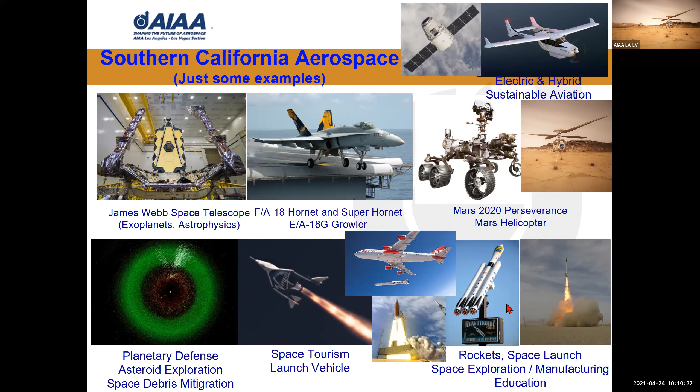Okay, so just a few words. Southern California, Los Angeles, Las Vegas section is very blessed with a lot of aerospace activities, from James Webb Space Telescope, Northrop Grumman, TRW, and Defense, Super Hornet, F-35, Rover, and JPL, just exciting Ingenuity, Perseverance, and planetary defense, asteroid exploration, space debris, Virgin Orbit, Virgin Galactic, and SpaceX, just right next door, and the many space students in this area, and also Aerojet Rocketdyne.

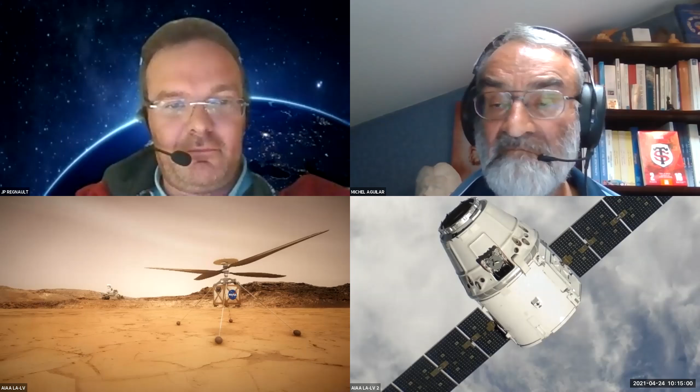Thank you, Ken. So let me share first my screen with a presentation, and tell me when you see the screen. So we have a 25-30 minutes presentation. Yes, no problem. You see? Yes, I see it. Okay.

So as we have introduced, and thank you again for having us, Ken. It's a great honor to be here from Meudon. As you have mentioned, it's a very small city near Paris, and you will see in the few slides that it's a birthplace of air ballooning in Europe, and it's also a place where the first wind tunnel in Europe was built in 1933, and I think quite also in the world.

Let's start with the bio of Michel. I'm trying to go to the next slide. Do you see the next slide or not yet? Not yet. Let me see. Why is there a technical issue? I did not manage to go to the next slide. Okay, here we are. Yes. May I have a small word? Yes, please, Michel. Thank you, JP.

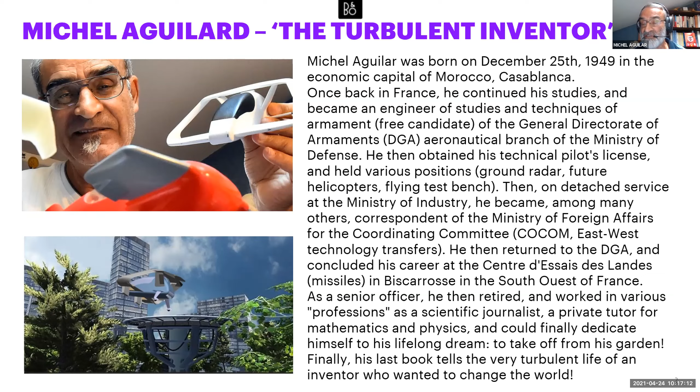And second, congratulations, very, very supersonic congratulations for the helicopter taking off from Mars. And you see, you take off from Mars, and we hope to take off from our garden. Yes, JP, for you. Yes, thank you for this first intro, Michel. And you will see, that's the title of this session: "Taking Off from the Garden."

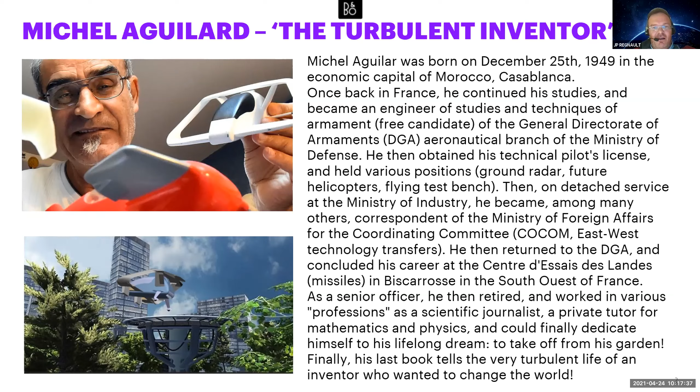And I remember the first time I met with Michel, it was 1 year ago. My impression was clear. Taking off from the garden is the obsession and definitely the dream of Michel after a brilliant 40-year career in aeronautics. Briefly about myself, but Ken, you've done it already, and thank you for that intro. So I'm living near Paris. I'm a great fan of all things around aeronautics and especially air ballooning.

And effectively, I've launched with some of my friends an initiative around this Star'Up Festival. It's a mix between startup and stars. The intent is to bring different experts and the general public together during 3 days. And the third edition will be late June in Meudon, near Paris. The intent is to bring to the general public what will be possible for the next 10 to 20 years around new types of transportation in space, in urban mobility, and a lot of subjects like this.

Okay, so this is the agenda of this 25 to 30 minutes presentation. First of all, the intent was to set the scene with a very small recap of what we call the theoretical basis around this new type of concept around the thermoreactor. Just after, we'll recap very briefly, for sake of time, what has been launched in terms of initiatives around this famous Humphrey cycle.

We will also deep dive into what has been the trigger for Michel around this thermoreactor innovation. We will describe then the discussions already held with the global ecosystem, not only in France, Toulouse, but also at the European level, to help Michel jump from disruptive ideas to a first proof of concept. And then we will conclude, before an amazing video, with what's next: the next intention and ambition of Michel to move forward with this disruptive invention based on the Humphrey cycle.

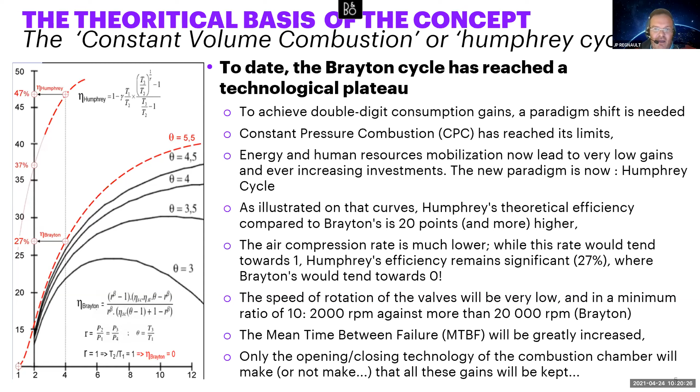And over to you, Michel, just as a short introduction around this very well-known Humphrey cycle. Thank you. The difference in efficiency between constant pressure combustion, CPC, all current jet engines, and constant volume combustion, CVC, the thermoreactor, is between 15% and 30%, depending on the mixing pressure in the combustion chamber. Mr. JP? Yes, okay. So the intent of this slide is just to recap the difference between the traditional constant pressure combustion and the constant volume combustion.

We have found in different articles what has been based on this Humphrey cycle, what has been already presented by the famous DARPA in the US. Also, the same type of studies have been performed by the DGA, which is the equivalent of the DARPA. The same in Germany, in Canada, and India. So in a nutshell, it has been demonstrated that when it comes to this Humphrey cycle, it's a real game

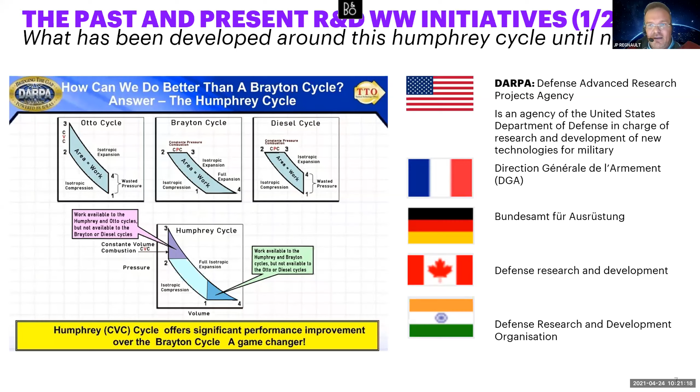changer. And we have presented this as an introduction because during his career, as I said before, Michel has been obsessed by the industrial implication of this cycle in order to bring this to the real capacity in terms of combustion and a constant volume combustion.

And by the way, if you double click on what has been performed during the middle of the 20th century until now recently with Pratt and Whitney, we see that based on this Humphrey cycle, some tangible research has been performed, especially by Rolls-Royce with Purdue University in the US, in order to see how to implement this Humphrey cycle with tangible engines applicable to airplanes and so on and so forth.

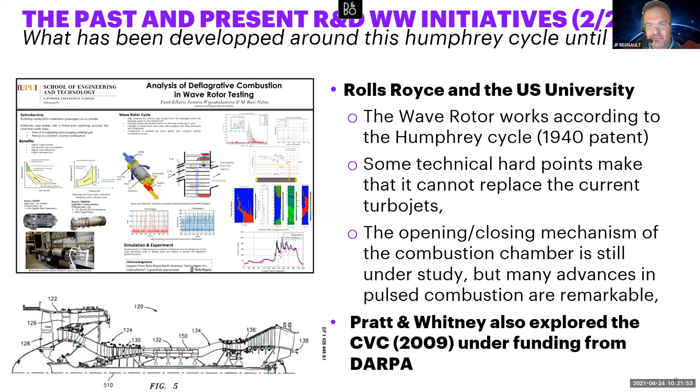In order to jump to this disruptive innovation brought by Michel, I would like Michel to share with our attendees what has been your motivation based on your long-lasting career. What has been your motivation? And I will say the trigger element, which I can imagine a morning you wake up and say, by the way, it is exactly what I have to transform when it comes to this Humphrey cycle. Could you share with us a few words around your motivation and what has been the trigger before your work

around the thermoreactor? Yes, my first tests on pulse combustion were carried out during my last year, 1977, my English, sorry, of training at the Aeronautical Engineering School in Toulouse. At that time, I was also convinced that opening and closing a combustion chamber could only be done with an alternative mechanism. JP?

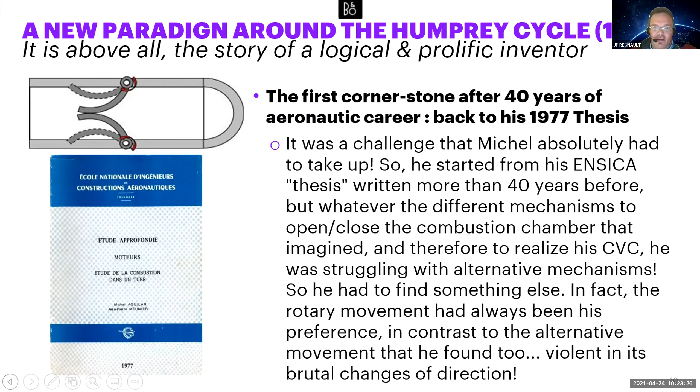So if I summarize in a nutshell, let me come back to the previous slide, sorry. So the key element around this innovation is definitely what we call the alternative movement as a continuous rotative movement. That's why we have a small animation. So tell me if you see the animation, where you see one cycle of the combustion chamber, which lasts something around 15 milliseconds.

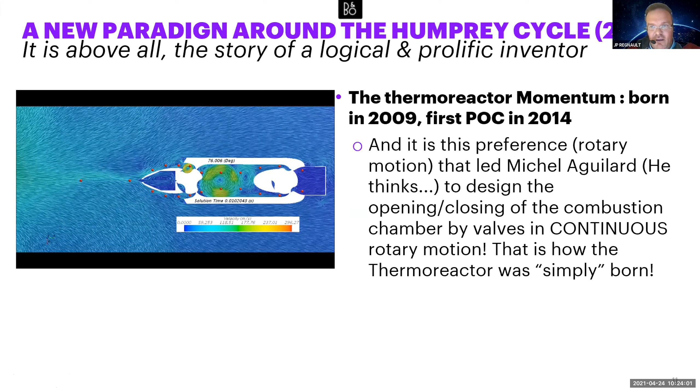You're okay with that, Michel? Yeah, yeah. So you see exactly the illustration of this disruptive innovation, meaning this constant rotative movement in the combustion chamber. Yeah, which is the most important, the rotative movement, the basis of this thermoreactor.

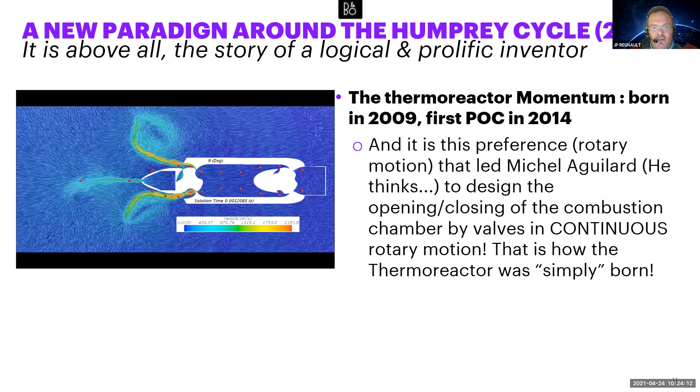Yes, correct. But beyond this theoretical basis, beyond the fact that we see that the performance of the Humphrey cycle is quite better than the Brayton cycle, which is currently governing the existing turbo reactors all around the world, Michel, could you share also what is the potential impact due to the small size of this thermoreactor engine for potential new business cases and business models?

And for me, I remember my first discussion with Michel. I think that beyond the better performance, and by the way, less consumption of fuel, we think by 20% minimum. That's exactly what Michel told me, and you do confirm that from a pure fuel consumption standpoint, we are reaching a decrease of 20%. This decrease, and we are at Earth Day, of course, is contributing definitely to the global warming equation, I will say.

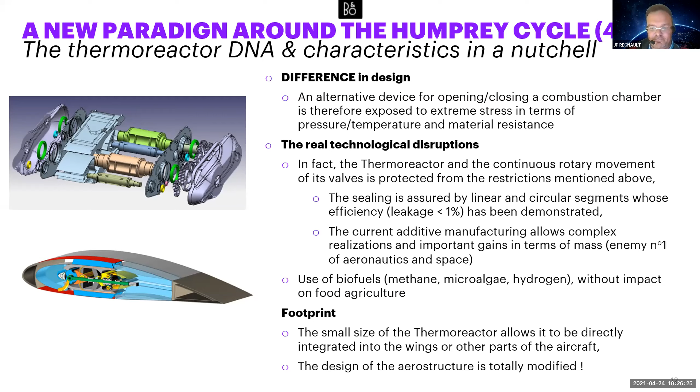And you see, JP is the big chief of our R&D. No, okay. No, you are joking. So

thank you for this transition, because, you know, especially in France, and it's the same in the US, an innovation is not real if you are not recognized by your ecosystem, your industry.

So could you share with us, Michel, what has been your journey when it comes to the patent you filed starting in 2012 in France? The US represents 50% of the world aviation, so it's very important — the US delivered the patent for the thermoreactor in 2018. That's very important for me, and I'm really very proud of this. Japan came before, in 2017. France, of course, in 2012. And Canada, the patent is still in progress.

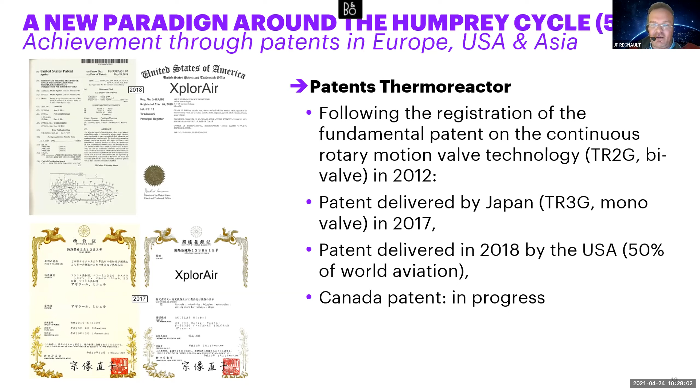Yes, thanks, Michel. So beyond these basic patents recognizing the technical feasibility of the thermoreactor, I know you have also performed additional patents dedicated to connected subjects, especially the drag reducer. Could you give us a few words about that?

Yes, the drag reduction patent is very important because it applies as well to aircraft as to rolling vehicles, cars and trains, and is particularly adapted to electric cars so as to increase their autonomy by more than 40%. I can explain the technology behind that, no problem.

The other patent, the ejector patent, in accordance with work carried out by NASA — this ejector, adapted to the thermoreactor, makes it possible to strongly increase thrust at takeoff, especially without overconsumption of fuel or degradation of drag. That's very important.

And the last one, for now — the reverse patent, still under examination in France. This device will make it possible to increase the thrust of the current turbojet during all phases of takeoff and the rise towards cruising altitude, without overconsumption of fuel. Very important. It's now under examination in France, and in the US too.

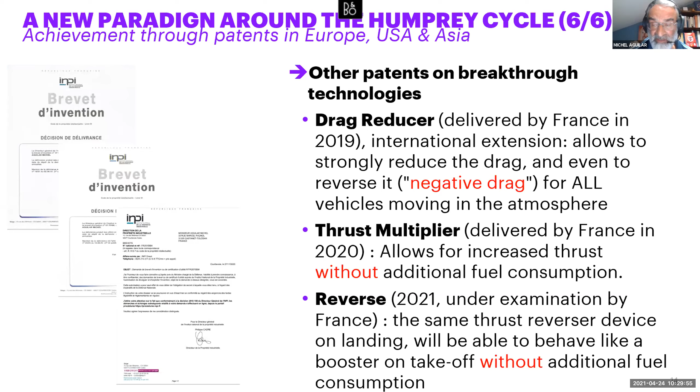So he launched, as mentioned, initiatives with the DGA, the French equivalent of DARPA, in order to model his invention and transform the concept into a tangible engine with the help of Dassault Systèmes, a well-known subsidiary of Dassault Aviation in France. And further initiatives with EADS, now the well-known Airbus company, headquartered in Toulouse as well.

And not only initiatives with the aeronautics ecosystem, but also with the Toulouse Business School, in order to prepare potential new business models and use cases. So you see, in parallel, a journey around technology disruption and innovation, plus anticipation of potential use cases.

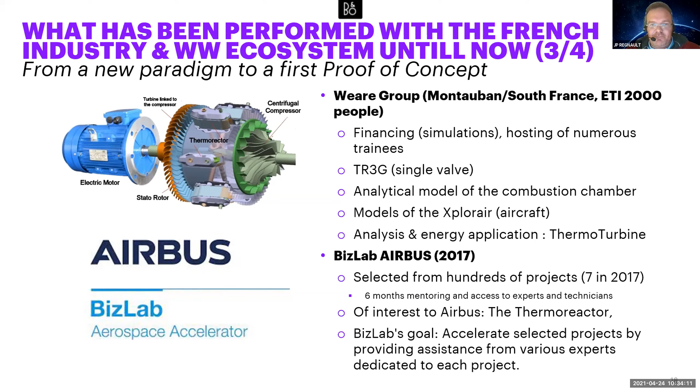Not a trap for you, Michel, but let's be transparent. If you have a dream and want to take off from your garden, you can imagine taking off from your garden. But if you produce the equivalent noise of the British Harrier or the US F-35, you can imagine it will create some issues with the neighborhood. So could you share with the attendees what has been the concern around the noise and what has been performed until now to find a solution to reduce the noise during the takeoff flight?

You can show this. You can read this illustration.

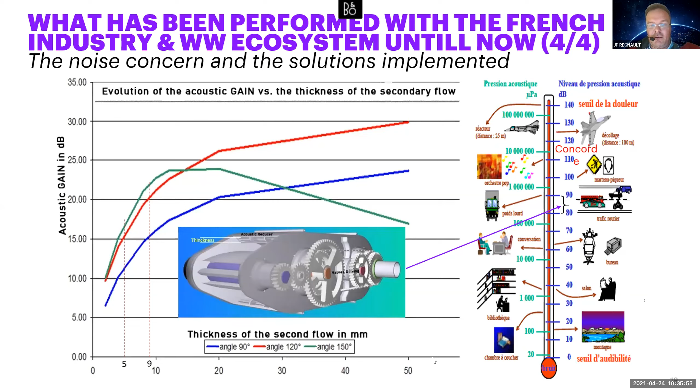So now the key question. If we summarize briefly this presentation, after 40 years of career in aeronautics, after a first successful tentative with different patents in France, in Europe, in the US, with let's say 10 years of discussions, R&Ds, workshops, participation in incubators and accelerators, we are now at the level of a sustainable proof of concept.

So what's next? Definitely, the intention is not to stick to this first proof of concept, stage 1. The intent of Michel is to move forward, aiming at reaching a pre-industrial prototype, adding all the technologies and disruptive solutions around the thermoreactor, as we presented before.

Correct me if I'm wrong, Michel, but your first assessment is to have something around an extra 28 to 35 months, so let's say 2 to 3 years, to reach a new plateau, a new level, and this pre-industrial minimum viable product, to be in capacity to present officially a drone version of the thermoreactor, potentially in 2025 during the Paris Air Show, and why not during the Nellis Air Show in 2025 also, and why not earlier? So this is where we are.

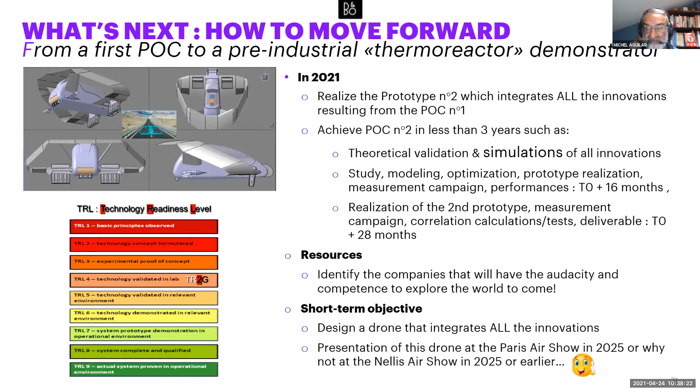So it's quite impressive. So now, as a conclusion, I hand over to Ken, just to play the video, which is a sort of a concrete dream presented in a video, showing a potential use case derived from this disruptive innovation with the thermoreactor. Ken, hand over to you.

Okay, can you see the screen now? Not yet. We see the first image, but I think it doesn't work quite well right now. Okay, I'll start playing. Or what I can do... Yes, that's good, it's good. We don't hear the sound. Do you hear the sound? No, I don't hear it. So what can I do? I've got a plan B, Ken. Let me try again. Because the sound is quite interesting also, and the comment. Let me know if you hear the sound. Yes, okay, that's good, loud and clear.

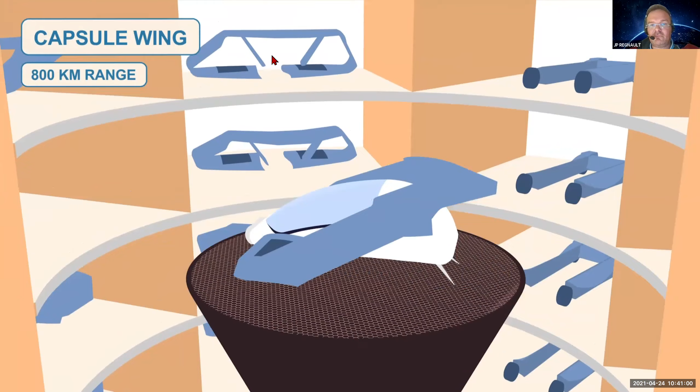A capsule chariot autonomously arrives to drive them to the nearby takeoff area, located at the outskirts of the city. At the gateway, their capsule is clipped to a wing for immediate takeoff. The capsule takes off vertically thanks to its revolutionary engine embedded in the wings.

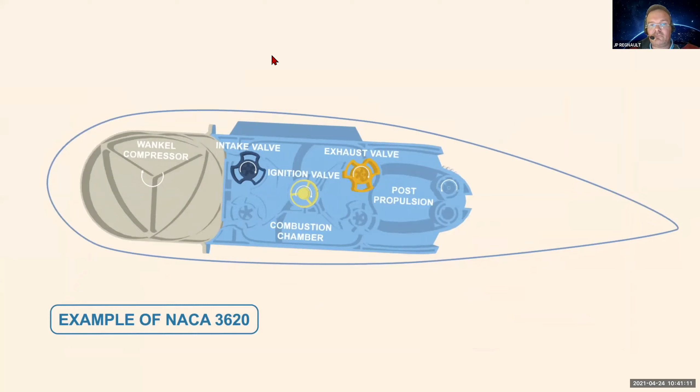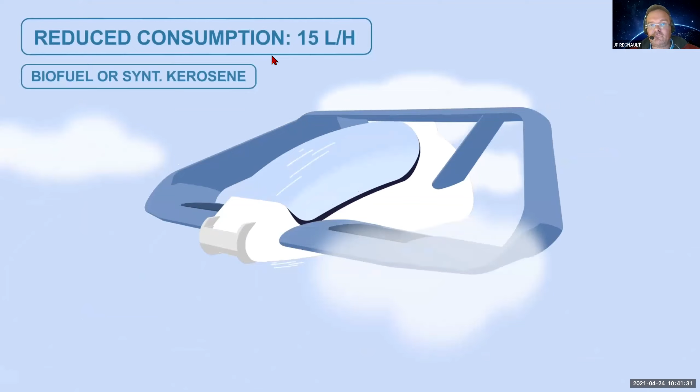In a few minutes, they reach cruising altitude and cover the distance at a speed of 200 kilometers per hour, consuming only 15 liters of biofuel per hour. Claire and Kataro can relax, enjoy the scenery, and prepare their arrival, thanks to the autopilot and security features.

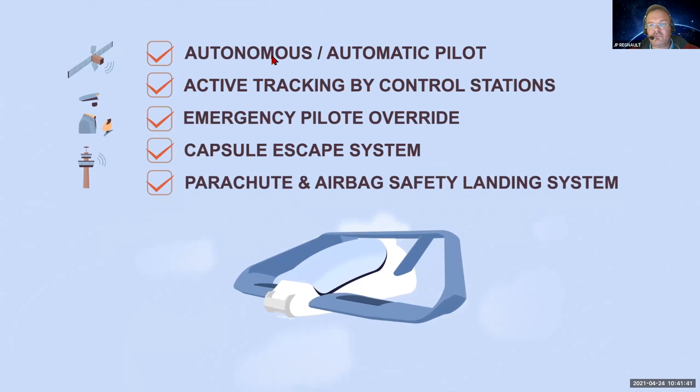Upon arrival at the intended destination, the capsule lands at the gateway and trades the wing for a chariot to drive the last mile. Claire and Kataro make it to their destination in time, relaxed, ready, and satisfied.

Yes, very good. And we are excited. Done. And so the next step is to move forward with Michel and potentially some other actors around this new journey.

And to make Michel's dream come true. Exactly. Yeah. So thank you so much, and please stay in touch and come back to tell us more progress.

And also remember, you said you would let us know the link and schedule for your festival. Yes, we'll post it. I will share with you, Ken, and if all the participants are, except due to the time zone between Pacific daytime and CET, there's something around 9 to 10 hours difference in terms of time zone. But I will be much more than happy to share with you, Ken, the Facebook Live address.

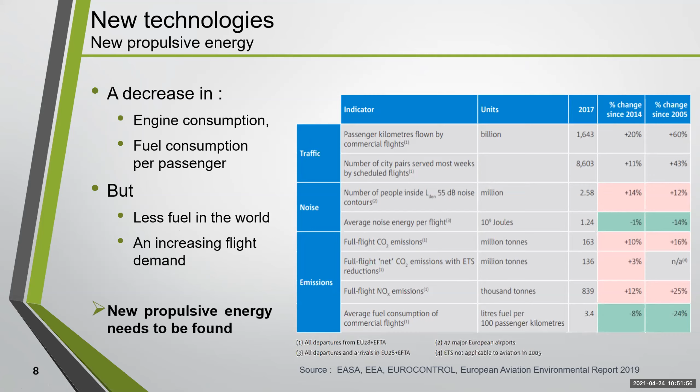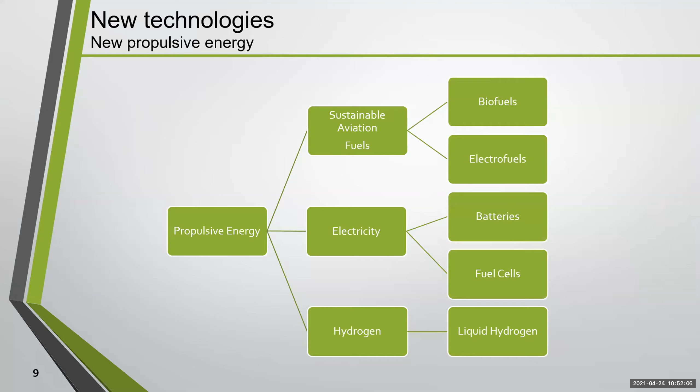A new way of reducing emissions during flight is to change the fuel used. Today, three energies are in front of us: sustainable aviation fuels, electricity, and hydrogen. Biofuels are made from compostable waste and biomass, and synthetic fuels are created using...

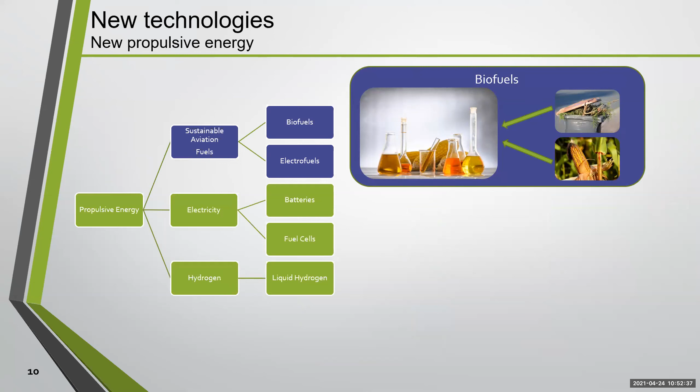...liquid hydrocarbon out of CO2 and water acquired from human emission activity, for instance. This solution is incredible because we are using unwanted material to create energy. Biofuels and electrofuels, the latter considered a renewable fuel of non-biological origin, can be used in current aircraft as a complete substitute for fuel. To keep operational safety in mind, we don't have to change power plant systems, and in terms of cost, using the same aircraft with these new fuels is economically attractive.

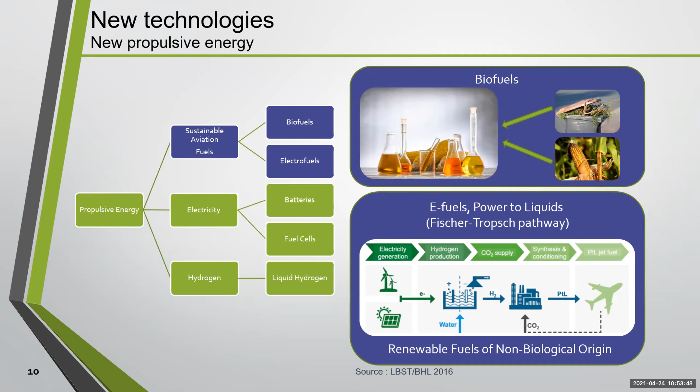So if we look at the second solution to reach the ultimate zero emission during flight, it would consist in using electrical energy instead of fuel. Even if electrical motors are more efficient than jet engines, by a ratio of 3, for example, if considering brushless motor technology, battery energy capacity is too low compared to Jet A1. Moreover, lithium-ion batteries are made of pollutants that can't be recycled or reused yet, transferring the carbon footprint onto the different life cycle stages for long-range aircraft.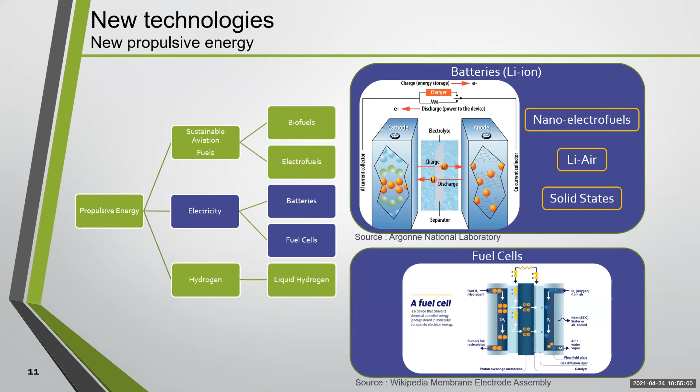So if we want to use batteries or electricity without the issues of Li-ion batteries, we can use either nano-electrofuel technology, Li-air, or directly change to solid-state batteries. If we look at hybrid configurations, for instance, it can be a generation of electricity combining fuel cells and liquid hydrogen, or the use of a high bypass ratio using LH2 as an onboard generator. LH2 is considered the third lowest carbon fuel according to Safran, as it has a rather high energy density of 120 megajoules per kilogram, and emissions stay only 50 years in the atmosphere if we take into consideration only the NOx during the flight stage.

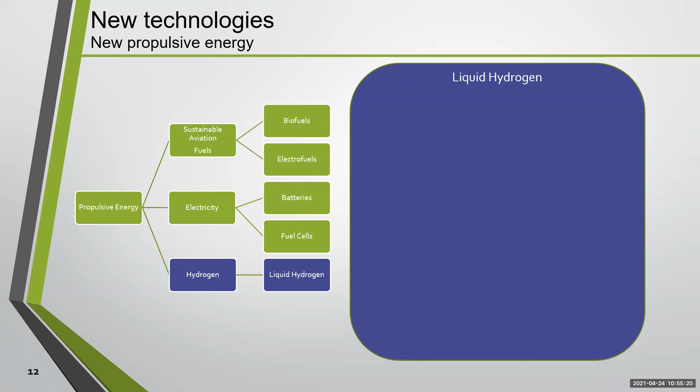So the main issues are regarding its production and bigger pressurized storage at a temperature of 20 Kelvin, which is incompatible with current aircraft configuration. Liquid hydrogen is very interesting because if we take steam methane reforming, which is not that expensive compared to electrolysis, for 1 kilogram of liquid hydrogen, there's a production of 10 kilograms of CO2, of CO, carbon monoxide. So depending on the way the propulsive energy is produced, we will have more or less footprint.

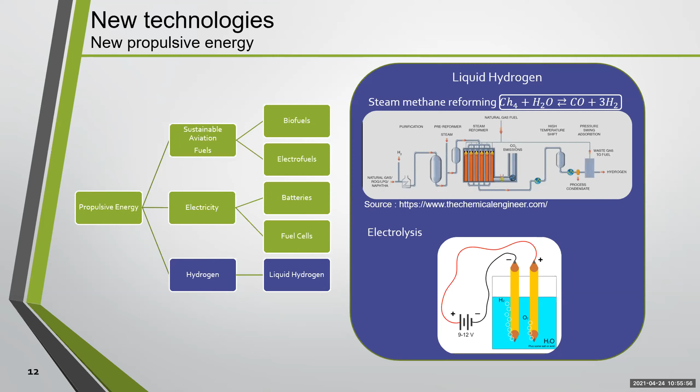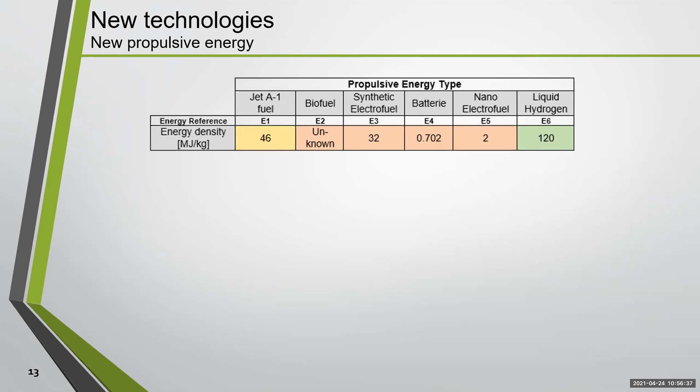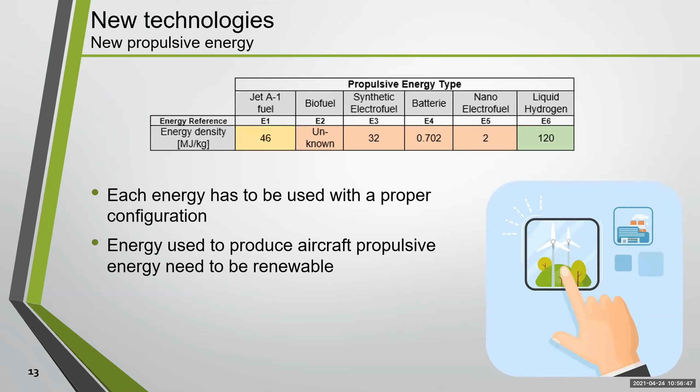So in the end, several solutions of propulsive energy are summarized in table 1, where you can see the different energy densities. We can see that liquid hydrogen is 3 times higher than Jet A1 fuel, and you can see why batteries are not very efficient yet. If we look at biofuel, it is not really known, and synthetic electrofuel is a bit lower than Jet A1 fuel, so that's why it's mixed with Jet A1 fuel when used. Those propulsive energies can lead to zero emission flight if the process of energy production is renewable. If we take electrofuel, it was estimated that its use in aviation in Europe by 2050 would increase the use of electricity by 24%.

So, after changing aircraft propulsion, the second stage to a more respectful aircraft is to change its shape, as we have been using the same single fuselage ring shape for years. Now, these systems and new technologies are improving aircraft structures to reduce drag, weight, power plant, and noise, decreasing the fuel penalty and finding optimum shapes for different propulsive systems. Two concepts of aircraft have lower drag generated during flight: box wing and blended wing body aircraft. Box wing aircraft have 2 superposed wings and a fuselage. We can also have a C configuration with a hybrid or LH2 propulsive energy, increasing the number of commercial routes. A configuration using the open rotor could help reduce noise and fuel consumption even more.

The blended wing body, also called a flying wing, has only a single trailing edge, and this reduces the drag. The length and the wide fuselage are suitable for LH2 circular tanks. Those configurations are more fuel efficient than a conventional commercial aircraft with the same capacities, reducing wingtip drag and allowing a fuselage increase for the box wing and a better lift to drag ratio for the blended wing body, as it's 20% higher than the current aircraft.

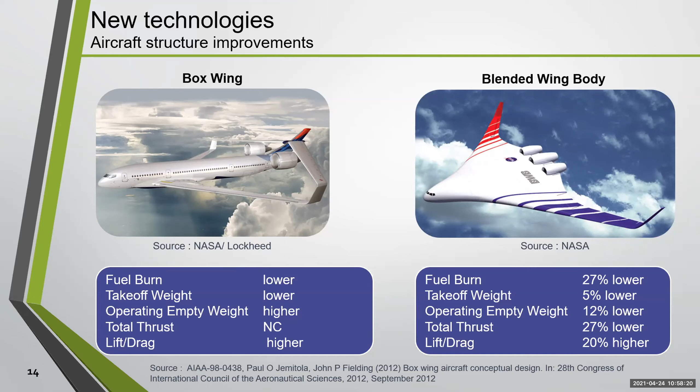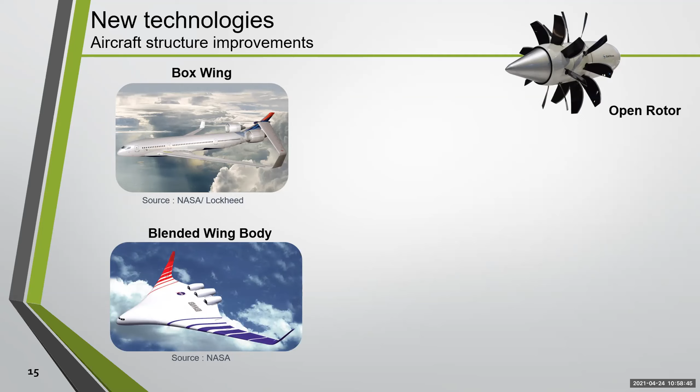So the use of those aircraft concepts can be combined with new propulsive systems. For instance, the open rotor is consuming 30% less fuel than the CFM56 or the LEAP while reducing the noise. The open rotor can only be used with fuel, so a hybrid configuration could lead to further application of this engine in the future. If we take the LH2 high bypass ratio, for instance, it's estimated to be a very efficient turbofan for long-range aircraft with good performances and noise reduction.

We can also take the distributed propulsion using a ducted fan, and that could be easily implemented at the rear of the fuselage, the wing, to create a boundary layer ingestion, decreasing the fuselage drag. So several technologies can be found. They will not be detailed here, otherwise it would be too long. So new airframe structure configurations in line with new power plants and propulsion systems will definitely help to build a more performant aircraft, allowing lower particle emissions and better aerodynamism. Technologies are still being characterized, but proofs of efficiency are already present.

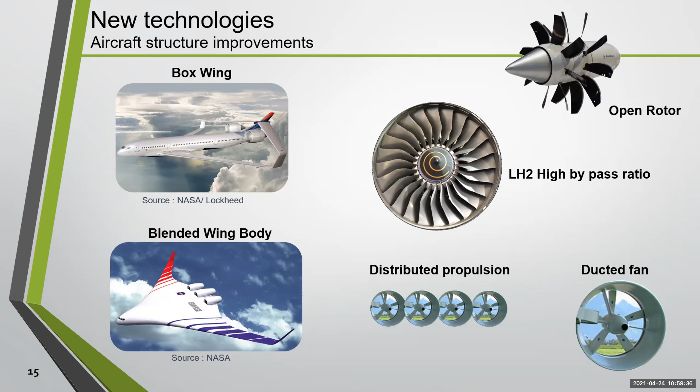So from the beginning of the conference, we started by talking about how we can decrease aircraft emissions without changing anything. The solution was to use sustainable aviation fuel. Then to go further, we can change its shape. And now we are going to talk about the different systems that we can enhance to help us to achieve our goal. Systems in the aircraft have an important role to play in making aircraft more environmentally friendly. And depending on what propulsive energy is being used, secondary power for systems will have to adapt.

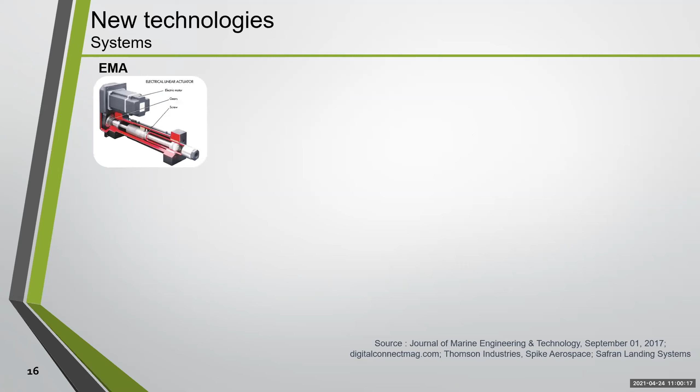Today, as everybody knows, batteries are not efficient yet, and studies are helping to create a more electric aircraft. In new generation aircraft, we will find more electrical power on board, and they will be equipped with electrically powered actuators like the electro-hydrostatic actuator and electromechanical actuator, which increase the efficiency and safety of systems. For example, the electro-hydrostatic actuator is a localized hydraulic circuit. The power needed to keep the pressure at the required level for actuation is lower as hydraulic losses are less likely to happen.

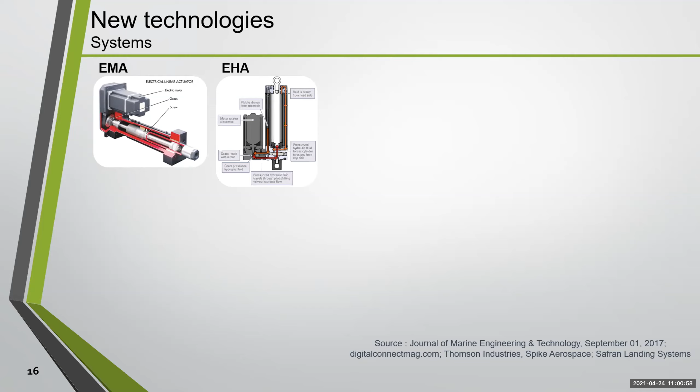Then the second concept that we listed for a more electric aircraft is the OLED screens. This will replace traditional windows and cockpit. Fake windows will allow a smoother structure, reducing drag and weight created because of structural reinforcement around the window. This technology offers a low electrical consumption while being lightweight, but concern should be given to the reliability of the technology and human trust and comfort in aircraft, because some people might have fears of height, so seeing outdoors can be very scary for them.

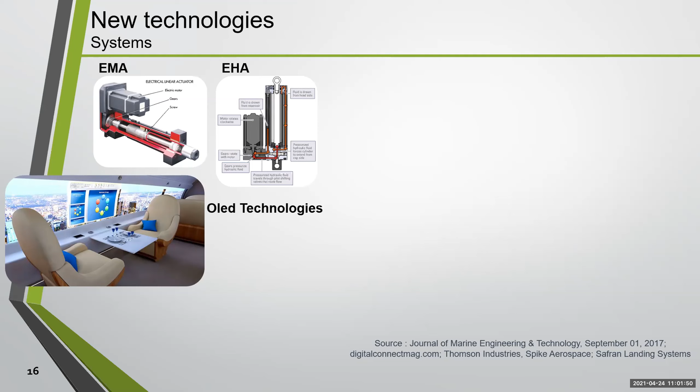Now we saw how to improve aircraft in the air, so what about on the ground? On the ground, the airplane has to be run from the gate to the runway. To ensure this function, e-taxi and regenerative landing gear are interesting, as the fuels to move the aircraft on the ground are energy consuming. So why not use aircraft inertia at landing to recharge batteries and reuse this energy to perform aircraft taxi? But the problem with this concept is that it will add weight to the structures with a poor battery efficiency to store the energy produced, and it could also increase fuel consumption.

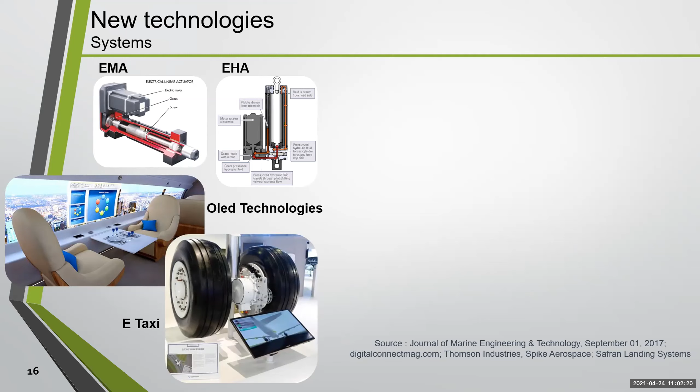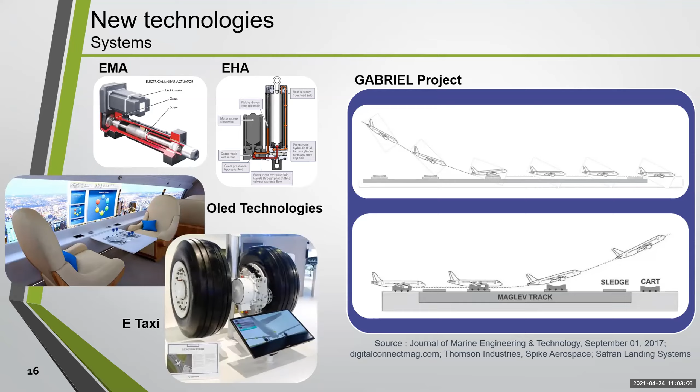So for this first part, the critical appraisal performed on new technologies to increase aircraft performances showed us the implication of aircraft industries to make aircraft greener. Several promising technologies and research have been made, allowing us to better understand the future of aircraft. So here we have a summary table where we gave some notes to the different technologies depending on the type of aircraft that we have. So we have military unmanned fighter, commercial aircraft, long range, high capacity or low capacity, short range, and cargo aircraft. And for each solution, we gave a note from 1 to 5.

So 1 is totally not suitable, 2 is feasible but not recommended, 3 already in use, 4 suitable, need more clarification, and 5 totally suitable. So numbers were influenced by different parameters, such as the life cycle of the aerospace vehicle. For instance, a military aircraft will not have the same life cycle compared to a civil aircraft. The immediate use of the new technology, whether the structure needs to be changed, and the feasibility of a new technology, if it's still in the research stage, will be developed in the next section. So for the next section, we will use the example of a short range low capacity aircraft like an A320, that can use battery, nano-electrofuel, or liquid hydrogen.

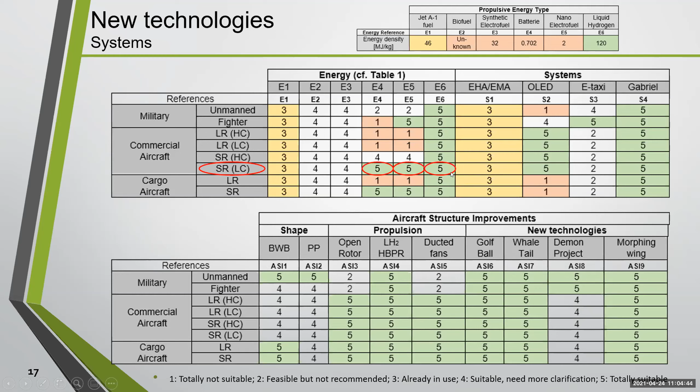So after introducing all those new technologies in the aircraft, we have to think about how we can adapt all the infrastructure needed for the new aircraft, how we will deal with maintenance and end of life. An aircraft life can be summarized in 5 steps, starting from the design, followed by the manufacture, the operation, the various maintenance, repair, alteration to achieve continued operational safety.

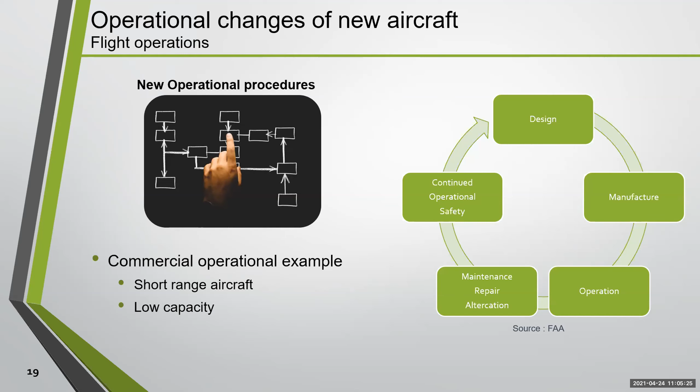If we lean on what we said before, a short range with low capacity full electrical aircraft can be a solution for a future aircraft. Short range aircraft are mostly affected to regional routes with short turn times and high numbers of flights a day. The main issue with this would be charging the batteries in a short enough time to have a relevant economic model to make companies earn money.

Fast charging of batteries creates heat and can damage the cells if it's not performed right. In CS 25 section 1353, electrical equipment and installations, it is stated that batteries temperature and pressure need to be the same at any time when it's used. An external cooling system will need to be found in order to not increase the weight of the aircraft during flight. And one of the solutions is to use nano-electrofuel by loading 2 types of fluid, one electrically positive and one electrically negative charged fluid on the aircraft as a traditional battery.

Concerning aircraft using LH2, first point should be made on the certification process. No mention of LH2 in CS25 is present yet, because the technology is too soon for the moment. This lack in CS25 could be explained by the different issues that are still up to date. So despite the fact that small changes in an aircraft could allow the use of LH2, temperature and pressure are the limiting factors, increasing thermal cycle and compromising safety of operation during refueling, for example.

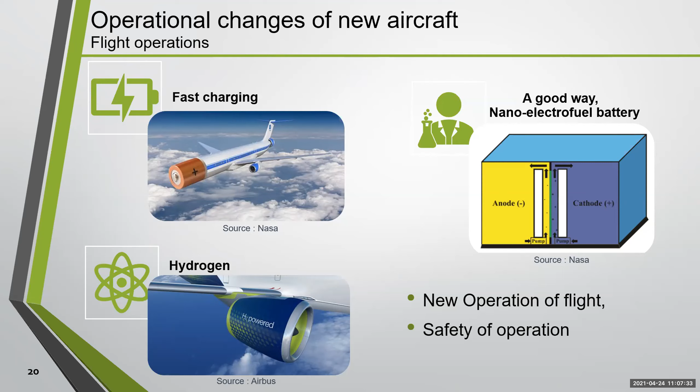Moving to airport infrastructure changes. So the aviation industry can go greener if we take into consideration all the chains, including airport infrastructures. So airports are also buildings that have aircraft and daily commuting cars. So how can airports help aviation to be more environmentally friendly?

So green airports can lead to several benefits, such as an increase in biodiversity and ecosystems, improved water quality, conservation, and restoration of natural resources. Plants and microbes help to degrade chemical pollutants and organic wastes. The presence of plants attracts pollinators, which provide economic benefits to the agricultural ecosystem, as it can increase the productivity of food crops, as well as giving a good natural environment for passengers.

Airports can help reduce aircraft particle emissions and noise emissions using building materials working as noise protection barriers, or encourage people to use public transportation. Alternative or renewable energy sources should be implemented and could also be combined with use of intelligent energy control equipment for lighting, heating, walkways, and escalators, for instance. These initiatives impose the installation at airports of wind turbines, biomass power plants, intelligent energy systems, recycling facilities, and so on.

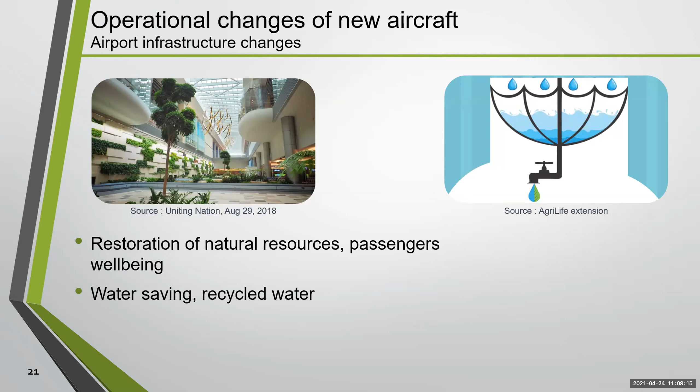So, airport configuration changes should take into consideration the future aircraft. We will need to add LH2 facilities combining production and storage, as well as maglev rail for the GABRIEL concept. A maglev rail should allow aircraft with landing gears to take off and land, as not all aircraft might use this concept. The global air transport is expected to continue its rapid growth, and at airport level, changes can definitely be put in place to reduce environmental, social, and economic impact and help the use of environmentally friendly aircraft.

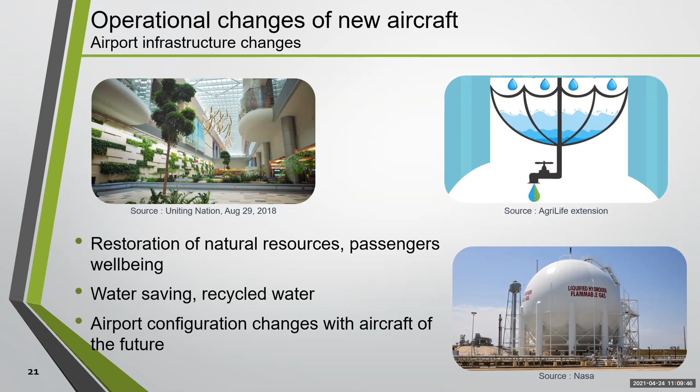Well, we were obligated to talk about the maintenance and end of life. Maintenance is compulsory to maintain aircraft airworthiness and is highly related to the end of life, as the mounting processes are similar. So recycling of aircraft will help reuse material, reducing raw material extraction, impacts caused by use of chemicals and transportation. Aircraft materials or products are reused at first, recycled at second, and disposed or burned at third.

So the most valued parts of the aircraft are the engine and the avionics, and are mainly sold for second use on flying aircraft. Previously, aircraft were constituted of 70% aluminum, as the A330, for example, and now tend to be composite, with the A350 using 70% of it in its structure. As you can see on the graph, you can see the 45 years of composite evolution and the different composition materials of the Boeing 787.

Why carbon fiber? Carbon fiber was used to reduce the structure weight and fuel penalties. Nowadays, 90% of the aircraft is valued during end of life, but carbon fiber is the missing part of this process. This material might save several amounts of fuel during flight, but recycling it is not possible yet compared to aluminum. New technologies might save energy and cost during flying, but the overall life cycle of an aircraft should be considered. New technologies such as LH2 and batteries, when considering the maintenance phase, can be less attractive.

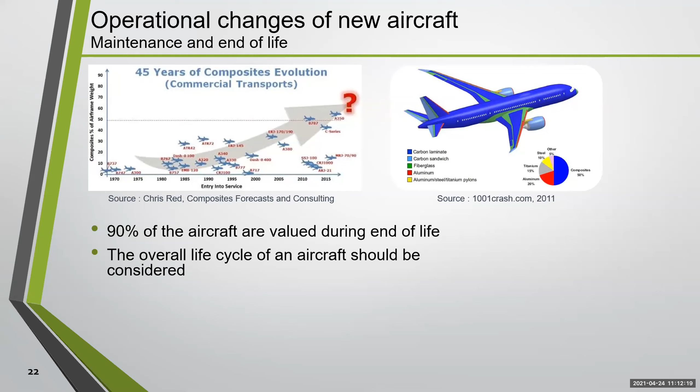So to help reuse and recycle aircraft, aviation stakeholders launched the Process for Advanced Management of End-of-Life Aircraft, or so-called PAMELA project, including research in 3 stages: decommissioning, disassembly, and smart and selective dismantling. The Aircraft Fleet Recycling Association, the AFRA, was confided by Boeing to set up new standards for aircraft dismantling, being responsible for 150 aircraft recycled every year.

And one company in Toulouse that we have is Tarmac Aerosave, which is also doing disassembly and dismantling of aircraft. So aircraft manufacturers are taking maintenance and end of life of aircraft seriously, showing good results and progress, and working in collaboration with the Committee on Aviation Environmental Protection to support aircraft sustainability development.

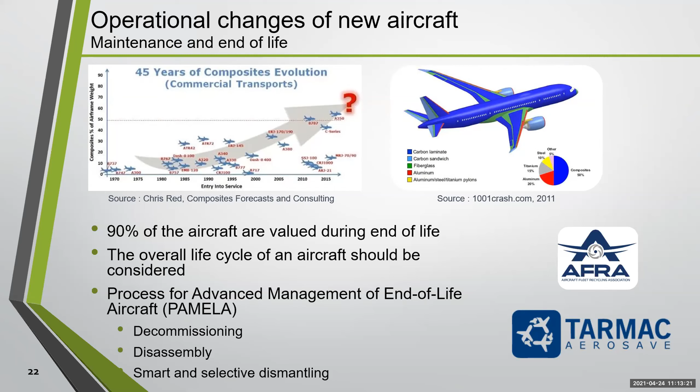All those improvements are helping us to fly in the future. Today it's a real challenge that we are faced with, and the COVID-19 pandemic accelerated its processes. Now we might wonder what role politics and consumers have, and what will be the social, financial, and political impacts. And at the end, we will show you a plan for the future of transportation.

So major technological changes are still in progress. Despite the urgent times, several immediate improvements can be applied on current aircraft. Before, we talked about improvements on electrification that can be done on aircraft, but they can also be done on software or onboard connected systems, which will help to acquire real-time information, and this can be very useful. For example, knowing the weather is very useful for the optimization of altitude in order to use less fuel. The optimal altitude of a plane changes along the flight as it consumes fuel, since its weight decreases.

Some companies such as Air France are working on flight route optimization using digital information to have better precision and reliability. OpenAirlines developed software based on data analysis from the flight recorder, meteorological data, and flight plan that enables companies to save fuel. And taxiing can now be performed with only one engine.

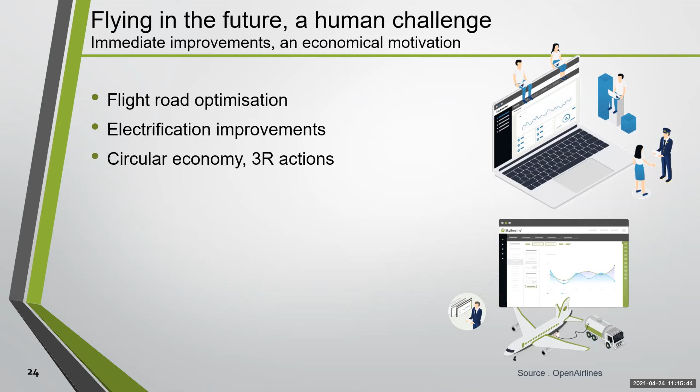Whereas the circular economy works to reduce waste, reusing and recycling rather than wasting resources. It tries to keep materials as long as possible. The three main actions are known as the 3Rs: reduce, reuse, recycle, and companies like Air France KLM started to adopt this strategy in their flight operations.

Applying the circular economy to aviation means a focus on designing and operating for sustainability, a design for reusability, a maximization in asset utilization, and better recycling. Therefore, it aims to reduce as much as it can the environmental and social impacts, as well as to increase response to a sustainability challenge.

This strategy can lead to a total modification of the supply chain from product design to end-of-life management. Some breakthroughs, such as 3D printers, are helping aviation transition toward a circular economy, but there are still improvements that can be made to leave the linear economy. According to the ICAO report, 3D printing helped reduce up to 90% of raw material consumption.

So if we apply circular economy to airports, the easiest thing we can do is redesign waste management, as Gatwick Airport did in 2016. This can lead to several positive results, such as reducing operation costs from saving on site energy and water up to £750,000 at Gatwick.

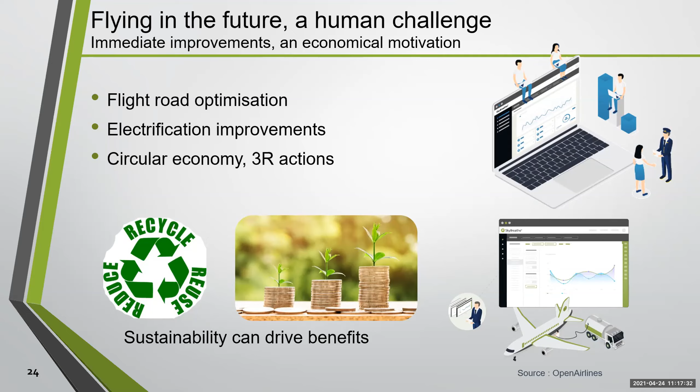So we saw previously that there are different technologies. What are the changes for operational methods for the operation of the new aircraft, and what can help change aircraft and keep flying green?

So, social and political choices. More and more human environmental consciousness is rising. Despite the fact that global warming was already known in the 1970s, actions are recent. Sustainability is now a state of mind, a way of living, and a political direction.

The aeronautical domain is facing what can be called aeronautic shaming or flight shame. A radical approach would definitely be to not travel or buy products from other countries, but attractivity in trips and exotic items is high. Some companies started to propose an additional green increased price to compensate for the flight's particle emissions.

It was proven that consumers are ready to pay an extra price, but willingness is a factor of gender, flight range, and gas reductions. So willingness to pay an increased ticket price to reduce gas emissions is encouraging, as it will help compensate for the high cost of a sustainable aircraft.

For example, with the green increased price ticket, if the flight range was low, people were more eager to pay more for the increased price ticket. And if the gas reduction was high, then they were okay to pay a higher price ticket.

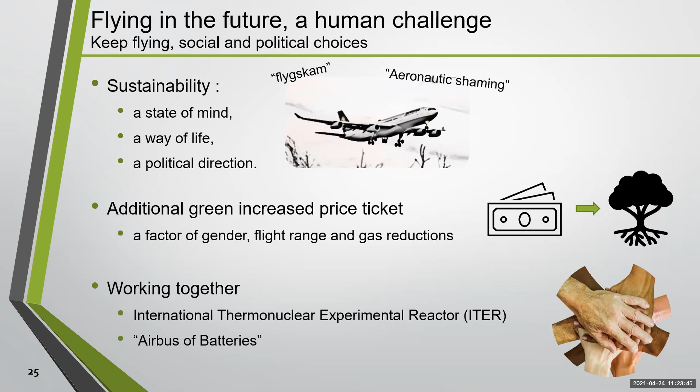Now we are going to present to you our vision of the future of transportation.

Electrical vertical takeoff and landing aircraft are considered the new urban way of transportation in cities. Uber plans to develop an urban air taxi network using eVTOL to transport people from one place to another through a ride-sharing system. They aim to create a quiet, fast, clean, efficient, and safe transportation system that is affordable for all. The issue they face is again the low energy density of lithium batteries, which prevents long distance flight. eVTOL can replace cars, but what can replace trains and short-range flights?

The Hyperloop, a project initially imagined by Elon Musk, might be a response to this question. This concept relies on magnetic levitation pods propelled at speeds of up to 760 miles per hour in a low-pressure tube. With this speed, it can connect major cities rapidly. This new way of transportation can help reduce congestion in airports and is more environmentally friendly with its low energy consumption. Furthermore, it will use solar energy via photovoltaic panels placed on the tube, and batteries will be recharged during the braking of the train. Thanks to the high speed, Hyperloop can glide using passive maglev energy and will use only 10% of energy to initiate final velocity over the whole path.

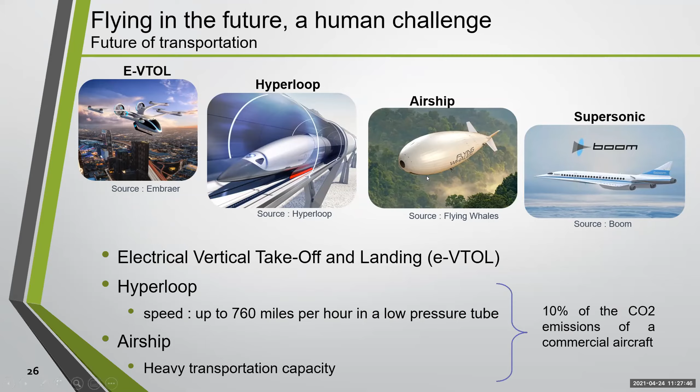So in conclusion of all this work, to answer the question 'be green, keep flying' that we were trying to answer: global warming and its accelerated evolution are concerning issues, and aeronautic stakeholders are definitely involved and actively participating in developing sustainable aircraft, shown with several technologies and research to achieve this goal.

New propulsive energy and new structures might take over traditional aircraft in the near future. It was found that depending on the operations, propulsive energy and propulsion systems would have different applications. Propulsive energy was found to be the most complicated issue in terms of technology, energy production, and density in general being low to compensate for Jet A1. Using renewable energy and oil substitutes is not enough for worldwide transportation demand. Energy will be more expensive, increasing economic and social split. Economic priority will allow rich people to fly in supersonic business aircraft, while the average person will stop fast travel.

Political stability, consumer passion, and worldwide partnerships are a way to help this transition to lower particle emissions. Clear and transparent knowledge sharing and collaboration will allow further progress. Global warming and energy production should be the next priority if we want to keep human traveling. Note that runways for aircraft have a lower impact in terms of carbon footprint than other transport, as they don't need roads or rail to circulate.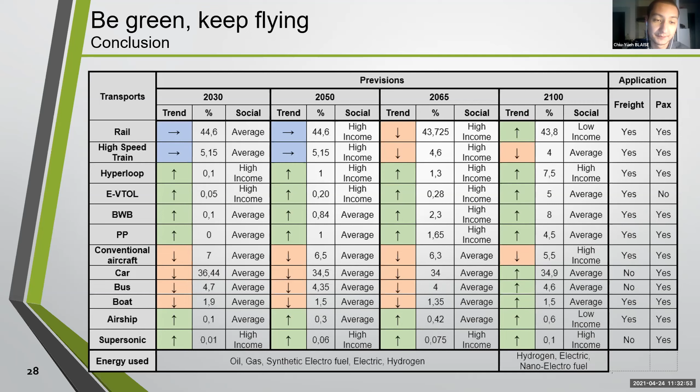So we would think that first of all, the structure - not having a conventional aircraft, maybe the blended wing body - and then combining with either LH2 high bypass ratio or the open rotor. So either LH2, or batteries - solid state batteries or nano electrofuel batteries. And the blended wing body has the most suitable shape to store hydrogen. So this can be the future green aircraft for us.

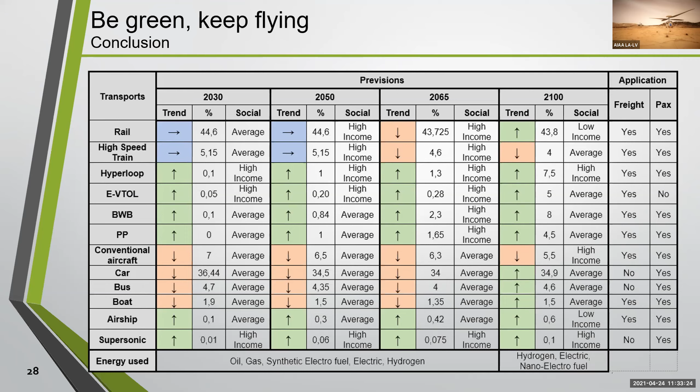Thank you, Ken. Hello, my name is Helen, and I'm a layperson. I'm a building architect, so I have no education or experience in the aerospace, aeronautical, or astronautical industries. I found your presentation extremely educational, thorough, and well thought out. Thank you so much for coming to present. I'm impressed, and I learned something new today.

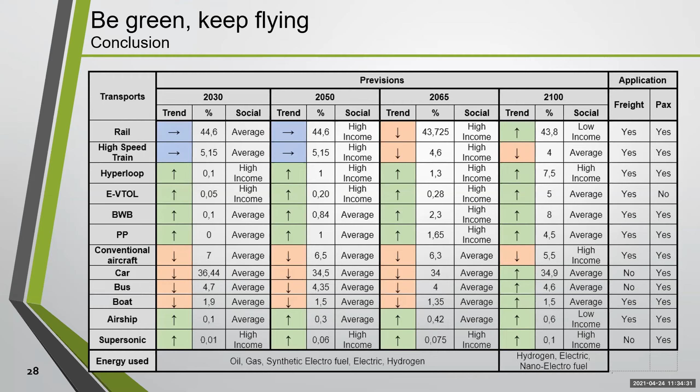What impressed me most is how much care you put into thinking about planet sustainability—that's very aspirational. The propellant energy constraint sounds huge; I'm not a chemist, so forgive my ignorance. As a layperson, cost is the number one concern, and the second is noise—I don't remember the terminology for these air taxis. People worry about what kind of pollution the aircraft will produce, whether it will scare away birds, how loud it will be, and what other unforeseen negative impacts it might have on the environment.

I think you folks seem to be on the right track with your research and studies. I don't have just one question—I have multiple. What do you find the most challenging? Is there a topic you find most difficult?